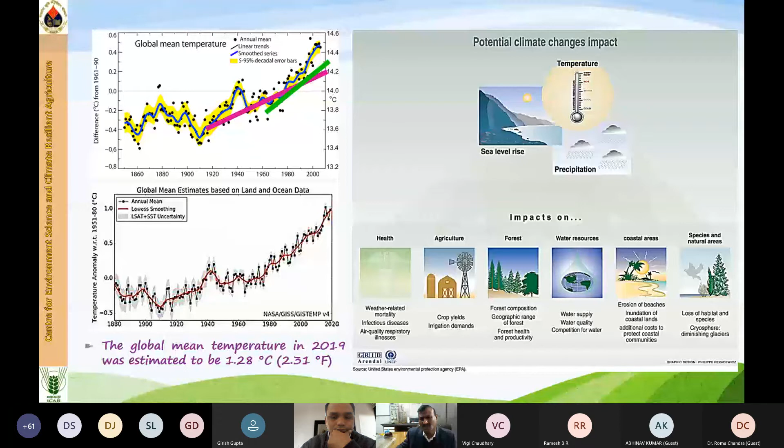So if we use these bioresources, directly or indirectly, we can reduce air pollution also, which is already affecting our health and agriculture in so many ways. So here are the solutions - what are the solutions to mitigate these things? We are talking about the solution towards clean and green energy by managing agricultural crop residues.

Agricultural crop residue is produced from field crops, especially material containing juices and sugar, and waste food grain is also included. We are also talking about lignocellulose biomass, stover, and animal waste products like cow dung and litter. Additionally, there is industrial biodegradable fraction of waste coming from agro-industry and food processing. These are the agricultural residues which can be converted into different types of fuel.

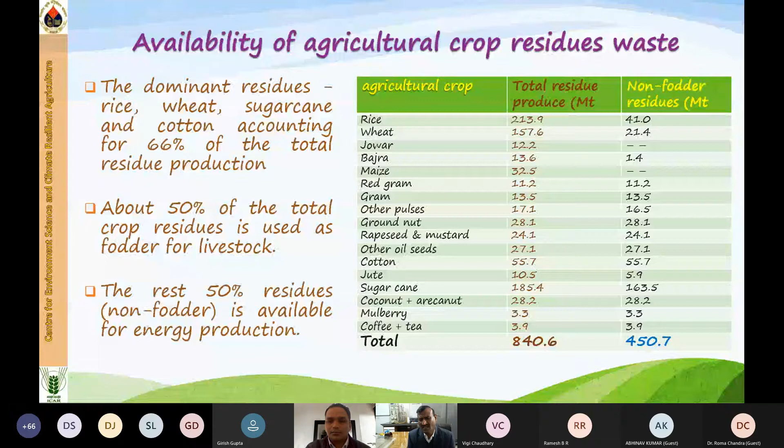The dominant residues like rice, wheat, sugarcane, and cotton account for around 66% of total crops, and the area is also very huge. About 50% of the total, we are producing 840 million tons, and non-fodder I am talking about is 450. It means 50% we are using as fodder for livestock, so the rest 50% is available. That is what we are considering non-fodder for energy production. So this is the situation.

Now let's look at the fraction of agricultural residue. Why are we talking about this? If you see the plant cell wall arrangement, cellulose, hemicellulose, and lignin are the major fibrils in plant cells. Agricultural residues may contain around 38% cellulose, 32% hemicellulose, and around 17% lignin and others. These cellulose, hemicellulose, and lignin give 75 to 95% of the total dry mass, of which around 70% is polysaccharide.

Polysaccharide here means it can be converted into sugars especially. The ratio of cellulose differs in crop species, so that is one of the important points. A typical example has been shown here.

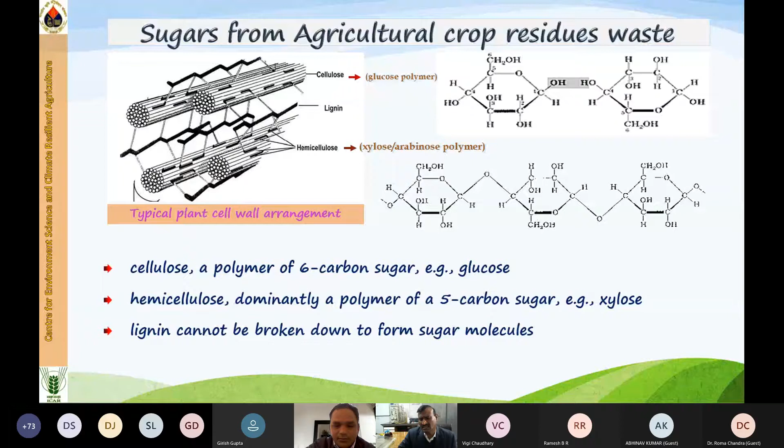This is the chemical route, the bioconversion technology process for converting residues to biofuel or bioenergy. All agricultural crop residue primarily produces biomass first, and then stored sugars, oil, or lipids, which are suitable for producing various types of fuel and energy. There are two routes: biochemical conversion and thermochemical conversion, which can be used to produce different types of fuel.

If we are fermenting, we are discussing 5-carbon and 6-carbon sugars, meaning glucose, which can be converted and fermented to bioethanol. They can also be fermented to biohydrogen through photofermentation process. Some lipids we are discussing can be converted through transesterification to biodiesel. Again, anaerobic digestion is a very important process used to produce biogas especially.

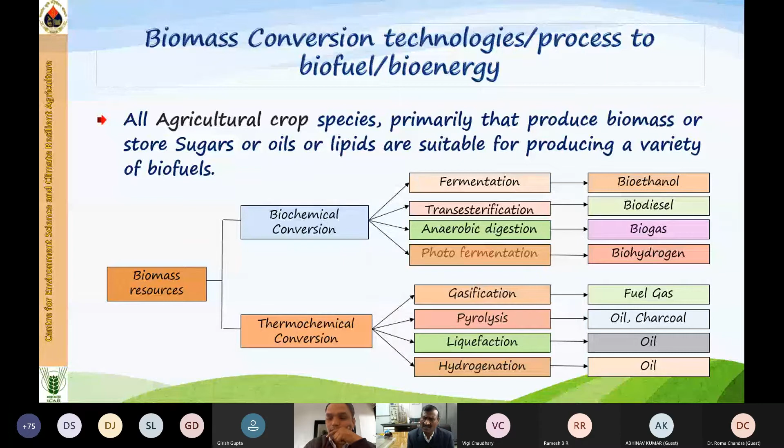The thermochemical conversion route follows gasification, pyrolysis, liquefaction, and hydrogenation, producing different types of fuel, especially gas, liquid, and char, sometimes called biofuels. These can be used to run different types of machinery, even vehicles or automobiles, and this is very important and followed internationally.

When we are talking about biomass, the question comes to mind about some sugars, like cane molasses or juice. They are actually directly in the form of simple sugar, meaning glucose, so glucose can be directly fermented to alcohol.

Grain starch can be directly fermented to ethanol or hydrogen. Here, some treatment is required that is called saccharification, using enzymes especially amylase. This amylase can convert starch easily to simple sugar, glucose, which can then be fermented. These two groups are called first generation biofuel, or first G.

Second, plants - all plant parts - contain cellulose and hemicellulose, so we call them lignocellulosic biomass. These are polymers of glucose, but they need pre-treatment called hydrolysis, using acid, alkali, or enzymes. This is complex and costly, but technology has developed to treat these resources, and enzyme production is now done by many companies at low prices. Converting lignocellulosic biomass to any type of fuel is considered second generation biofuel.

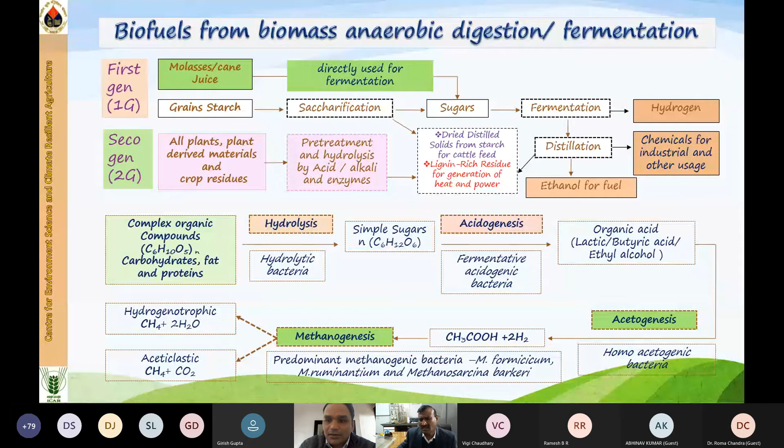When converting lignocellulosic biomass to biofuel, the first step is pre-treatment of the agricultural crop residue biomass. During pre-treatment, the fibrils of hemicellulose and cellulose, which are bound by hydrogen bonds, are loosened. The hydrogen bonds are broken down, and the fractions become loose so they can be broken down further. Pre-treatment helps enzymes act efficiently in the process of saccharification, enzymatic hydrolysis, and then fermentation using bacteria.

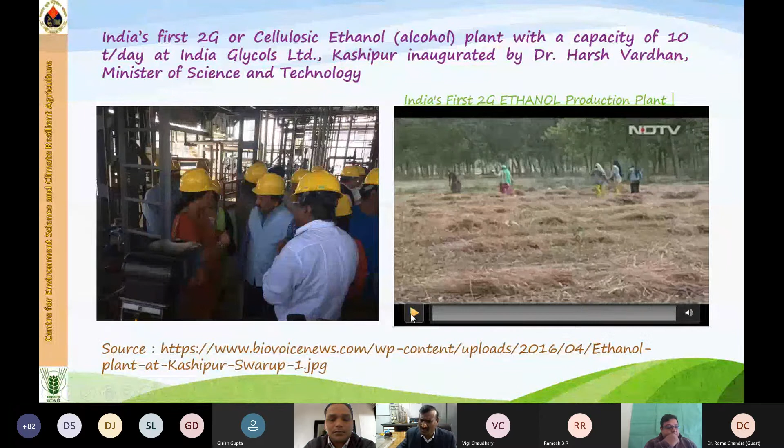Worldwide, not only in India, cellulosic ethanol production, what we call second generation fuel, is being produced, and India is also not behind. We have developed our first plant in Kashipur, which was inaugurated by Dr. Harsh Vardhan, the Minister of Science and Technology. I have loaded a video here, I hope you can see it.

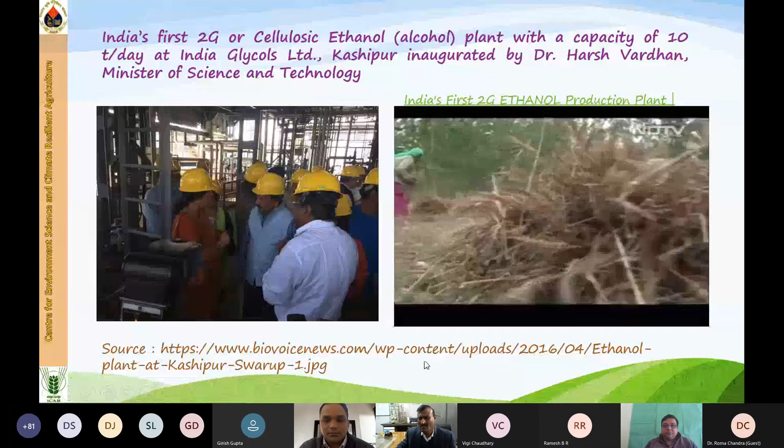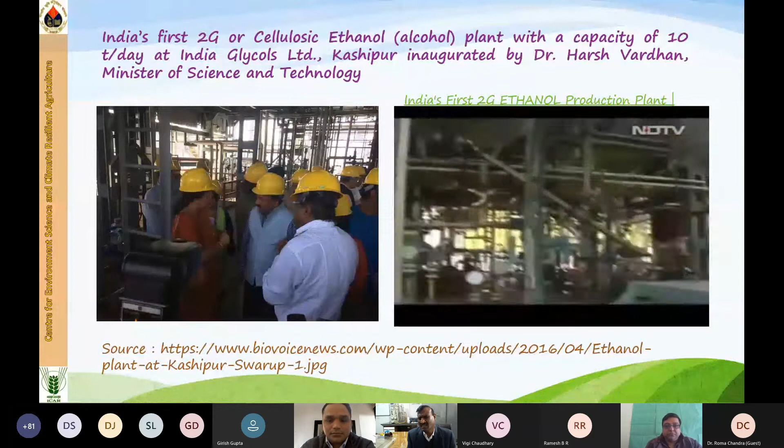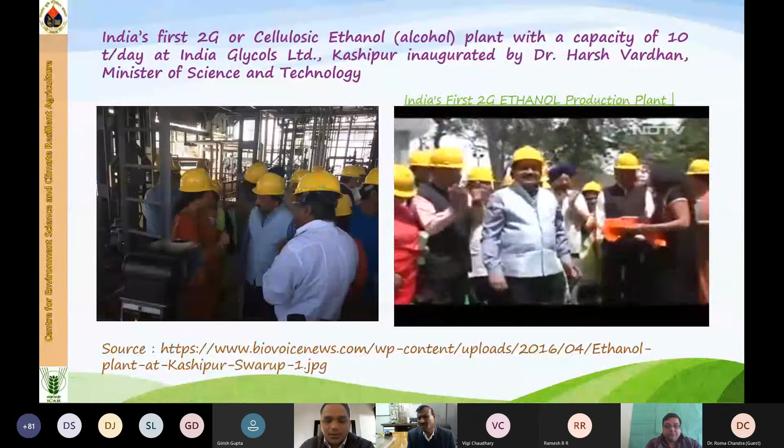Hello. Yes, sir. Hello. Yes, sir. The voice is coming. No, the video voice will not come, sir, but the video is playing. Okay, so I'm just... let the video play first, then you can explain it. Hello? Your voice is not coming.

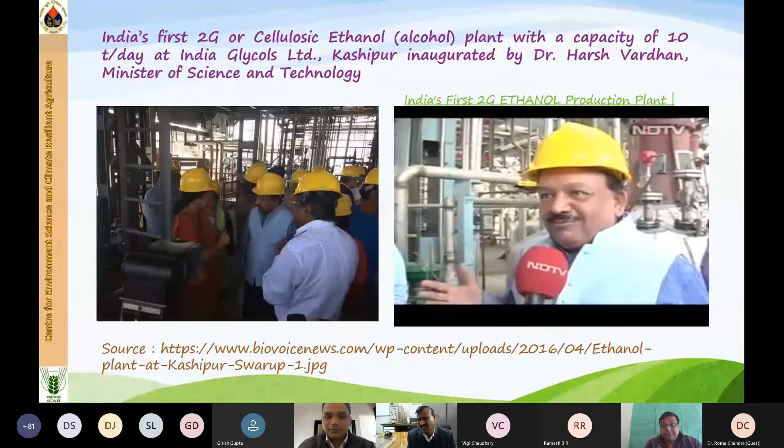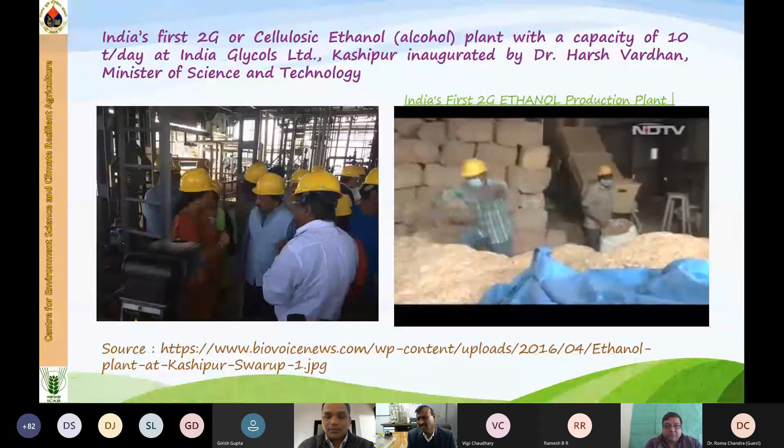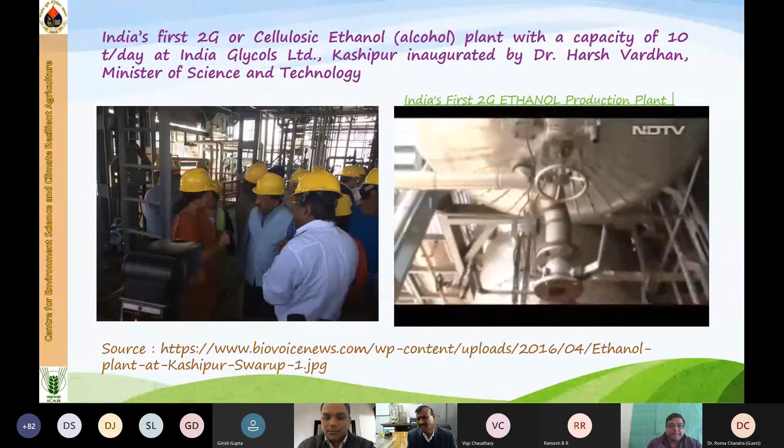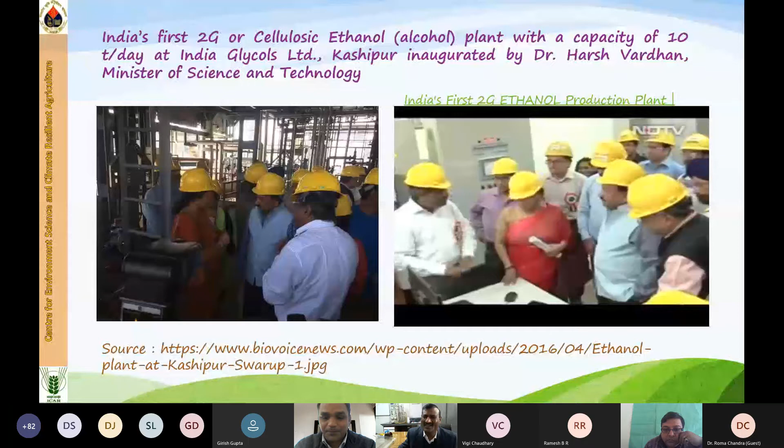Hello? Your voice is not coming, sir. Once the video is played, your voice should be okay.

Hello, hello, yes sir. Vikas, it is clear sir. This is showing how the plant is working in Kashipur. Hello, yes sir, my voice is coming.

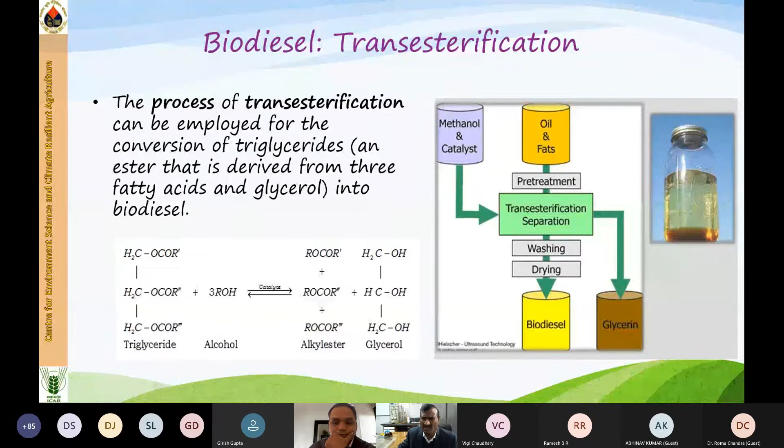So keep this in mind when talking about biodiesel. The thermochemical conversion process is also very important - pyrolysis and gasification are thermochemical processes where biomass is combusted into gaseous fuel, and biofuel is also produced. Some char is also produced through different processes. The main aim is to produce heat to generate steam to run the boiler, which runs the turbine, and we can generate electricity that can be transmitted to electric lines.

So remember in Rajasthan, the Gangapur area, we are using mustard waste for producing energy. That plant is successfully running now, I think 3 years back, and it has been successfully running for 3 years.

So here is some important technology, that is co-gasification, of biomass waste and coal, which is found to reduce greenhouse gas emissions and is considered a sustainable and eco-friendly technology.

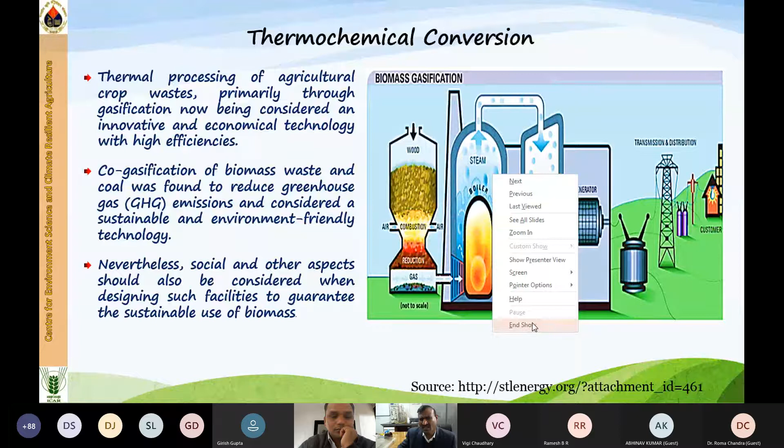But some of these things society must accept. Sometimes the smoke, sometimes other issues, must be considered when designing this. Already some of the issues have been taken care of by the industry. So when we are talking cleaner and greener, keep these things in mind.

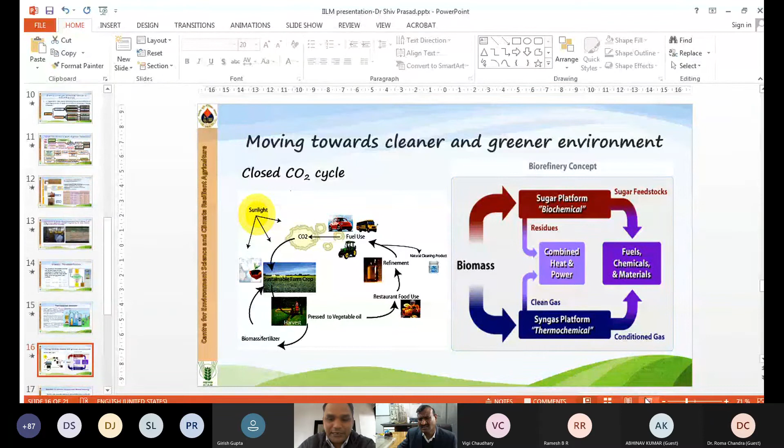Hello, hello, hello. Yes, sir. Which slide board is this in? Hello. Yeah, it has been switched to main PPT mode. Slide mode has gone. Okay, now it is in slide mode. Okay, it is okay now. Yes, sir, hello sir.

It is okay now. So when we are talking about moving towards greener, keep in mind, as we know, whatever biomass we are producing, through photosynthesis they synthesize those photosynthates into biomass, oil, and sugar.

Remember, in photosynthesis, carbon dioxide is the main input. So when we are burning anything, carbon dioxide is released. Whatever biomass or agricultural residue we produce, if we burn or convert it to fuel, some carbon dioxide may be emitted, but that carbon dioxide may again be taken up by the plant. So this is a closed cycle CO2 cycle, meaning all carbon dioxide emitted is again utilized by plants through photosynthesis.

So this is somewhere we call carbon neutral biomass. If you are using this, there is nowhere pollution from a production point of view.

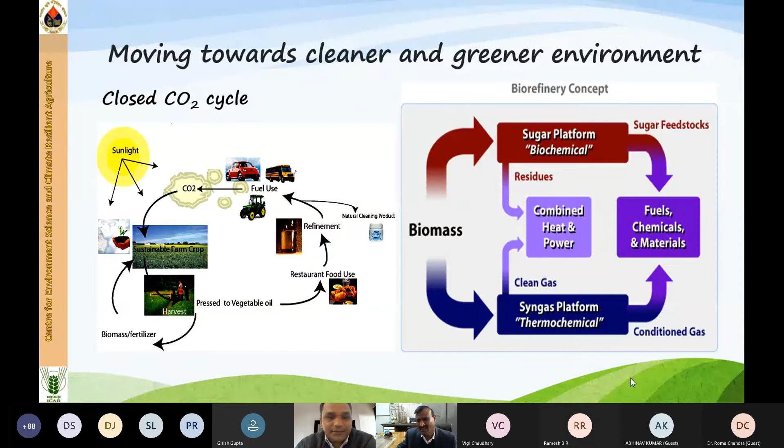Is the slide moving? Hello. Moving. It is moving. No, it is fixed, sir. I mean the slide is moving towards cleaner and greener environment. Now it is okay, sir, it has come to next slide. So this is again, I'm talking reduction of pollution emission with biodiesel blending. Okay, it is visible, slide is visible. Yes sir, slide is visible.

So here we are using blending of biodiesel with diesel. We call using 100% neat biodiesel as B100, and if you are using 20%, that is called B20. There also for ethanol, if you are using 20%, we can say E20, and if you are using neat alcohol, that is called E100. Here we are using biodiesel.

According to EPA, the Renewable Fuel Standard Program Regulatory, they have analyzed and found from soybean oil, 57% reduction in greenhouse gases as compared to fossil fuel, and 86% reduction in those pollutant gases. So here you can see in this slide also, we are using B100, meaning neat biodiesel with no blending with diesel. But if you are blending 20% with 80% diesel, how are they helping?

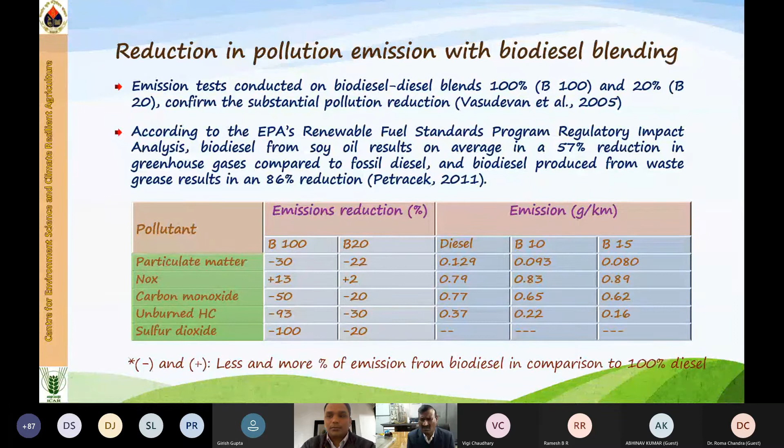That is satisfactory. Even emission in g per km is shown here, compared with diesel, that again reduces in a good amount. So that is the benefit of this biodiesel blending.

Now biogas. Biogas can also be used as a vehicle fuel, just like natural gas, for running our vehicles. So in this first slide, see the pollution reduction in kg per year by family size biogas plant. I am using the word family size because when talking about biogas, we use terms like 1 cubic meter, 2 cubic meter, 3, 4, even 5 or even 50 cubic meter biogas plant, referring to the size.

So if you are talking family size, that means a plant for a maximum of 4 members, so a 4 cubic meter or 3 cubic meter size biogas plant - that is what we call family size. If you are using a family size biogas plant, we are cutting down on kerosene, firewood, and similar fuels, and we can save a huge amount and reduce pollutants by a very good amount.

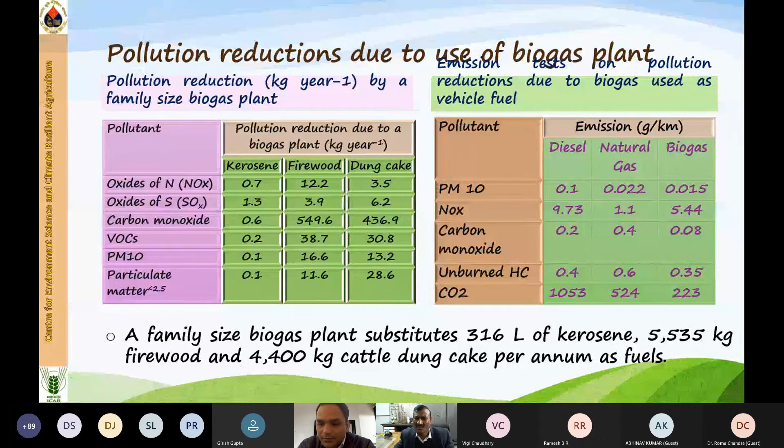This is the last slide.

I'll summarize that the conversion of agricultural crop residue waste to biofuel and bioenergy will help avoid biomass burning, which is a big issue. Its use will provide a cleaner substitute to fossil fuel. We need this because of energy scarcity, and substituting fossil fuels can reduce the import bill and trade deficit. It also provides energy security, opportunities for industry and rural employment, and helps reduce air pollution and mitigate climate change impact. We have already discussed some of this, and it offers a solution for a cleaner and greener future. So that is all about these things.